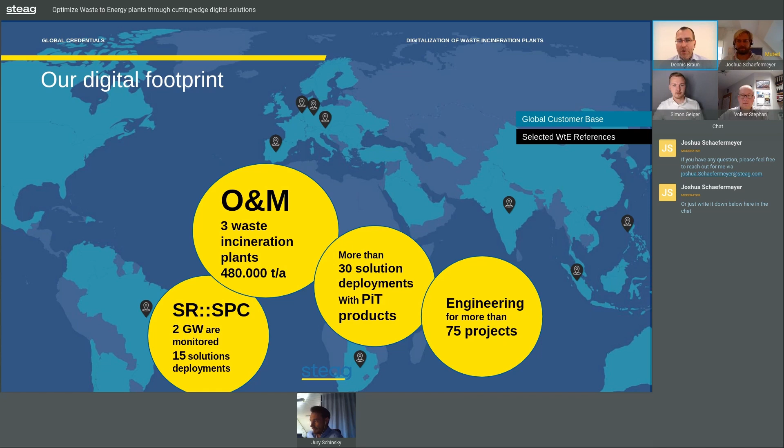Here's one view for you. That's again our map where we have customers around the globe, where we have partners. That was last time our view. And here for today, we compiled the waste to energy numbers. More than 2 gigawatts are already using our SRSPC, the module for predictive maintenance that you have seen here. We have more than 30 solutions with our PiT products deployed, which is especially what we will see with Volker pretty soon. And we have done engineering services in waste to energy projects for more than 75 projects, also around the globe. So that's pretty interesting, let us finish our little overview here.

And those are to maximize waste throughput, to reduce emissions, to reduce maintenance costs, and avoid unplanned downtime. That is something we will see with the SPC solution pretty soon. It's not about giving a warning a minute before something goes bad. It's about giving a warning a week, a month, 2 months in advance when possible. But of course, then it has to be very solid, very precise, so there are no false alarms that people have to take care of.

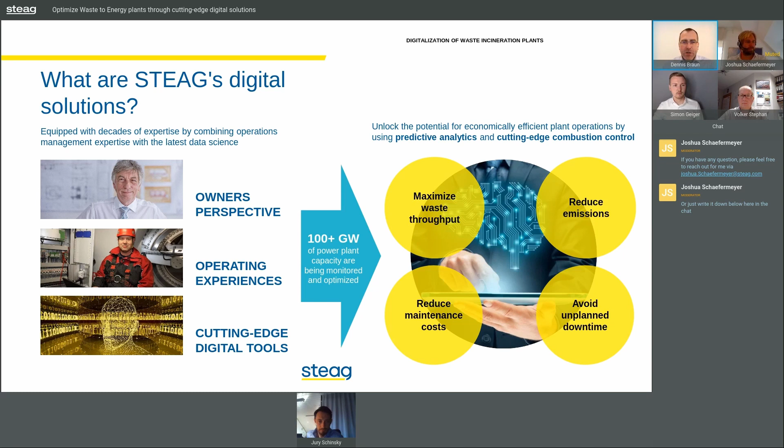So let us sum it up here, also with a couple of references already for the waste to energy applications. The things we use for these projects include EBSILON Professional, this tool we have for designing any kind of thermodynamical cycle, heat balances, and property tables. It's a highly sophisticated solution, and you can even get a test version if you reach out to us afterwards.

Next is the real-time AI-driven predictive analytics module, SRSPC, also with a machine learning module. We will see that pretty soon again.

We have another solution, SIPAM, which is a condition monitoring and maintenance system. So if that is part of the solution that's needed, we also have this to organize what measures are necessary, what needs to be done, when is it necessary to change the oil or filter and so on. That's all part of that module.

Then we look at the APC solutions: PiT Indicator for the complete temperature profile of the combustion chamber, or the PiT Navigator, which is able to optimize furnace capacity control by means of artificial intelligence.

Different modules are used in the projects shown on the right-hand side: Kassel, Rosenheim, Mannheim, Simmeringer Heide in Vienna, Ruhleben, Krefeld, Asdonkshof, Bonn, Vestforbrænding, and Rozenborg.

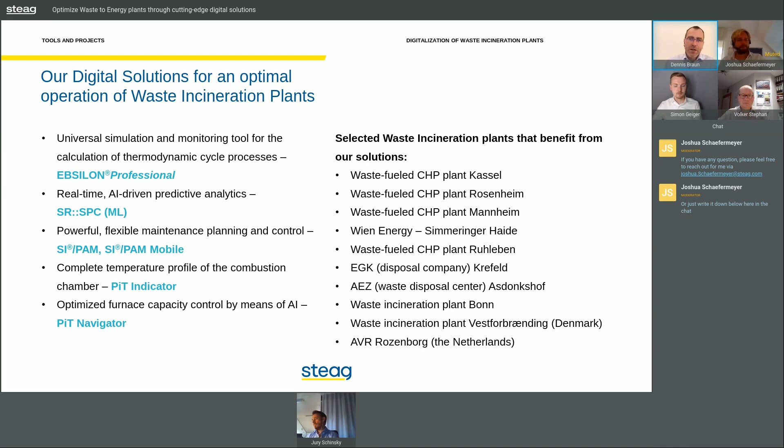So you see already a choice of projects. You can ask questions afterwards. We can have a private talk afterwards if you have specific questions, but this is today to give you an overview and show you what can be done. And if that's a topic for you, reach out and we will have further discussions afterwards.

So that's it for the short introduction here. I would now ask Simon to take over for a little bit and show us a little bit more of what we have there, right?

Yes, thank you very much, Dennis, for this nice introduction and the warm words. Welcome as well from my side.

I want to start with the solution Dennis talked about last, the PiT Navigator for waste incineration plants. And yes, I want to start with a short introduction.

The thermal waste treatment plants operate close to maximum incineration capacity in Germany and I think in very many countries around the world. Despite high capacity utilization, there is still potential that can be exploited, for example, through the use of artificial intelligence for combustion optimization.

With the following slides and in the following minutes, I want to describe the components and functionality of our modular system and concept for an AI-based combustion control for thermal waste treatment plants.

And yes, before I get into the technical details of the system, I would like to approach things a little differently today and start by telling you a few facts about the product that has been successfully placed on the market for many, many years.

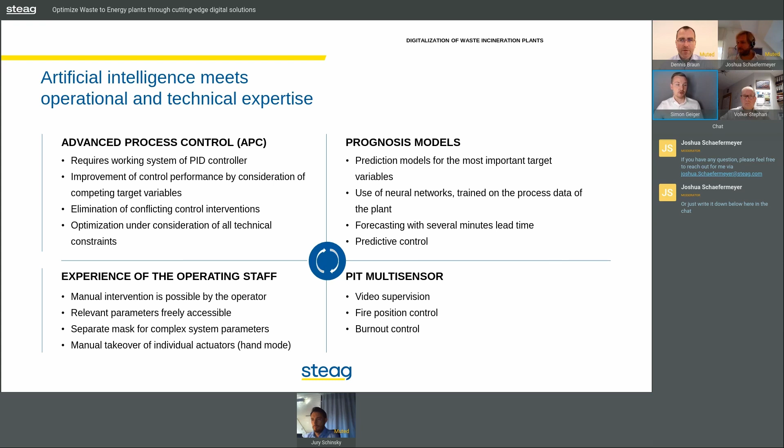Depending on the type of plant and the tasks to be carried out, additional information, for example the left-right inclination or the intensity of the fire, can also be extracted from the image and transferred to the control system. And with the next two slides, I want to show you just briefly two types of pictures.

You can see on the right side of the slide a temperature profile which is set by the PiT multisensor. You can have a close look, and you can see what temperature you have in which area of your grate.

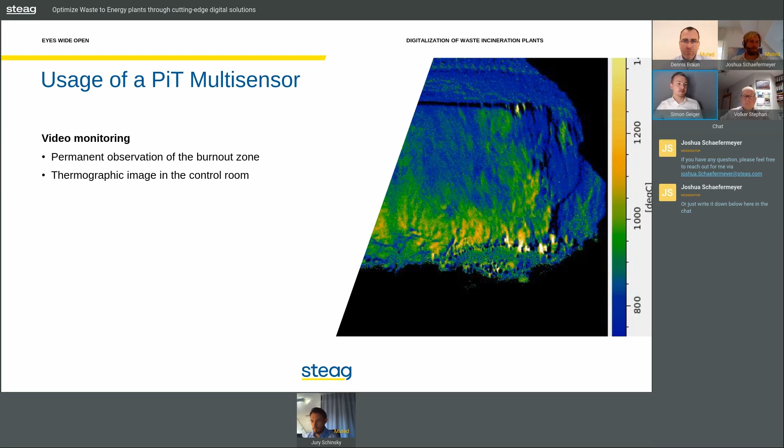And the other picture just shows, with a dotted line, the calculated and the detected fire end line position. All this information which we get from this multi-sensor goes directly into the system and is taken into account in the controlling of the system.

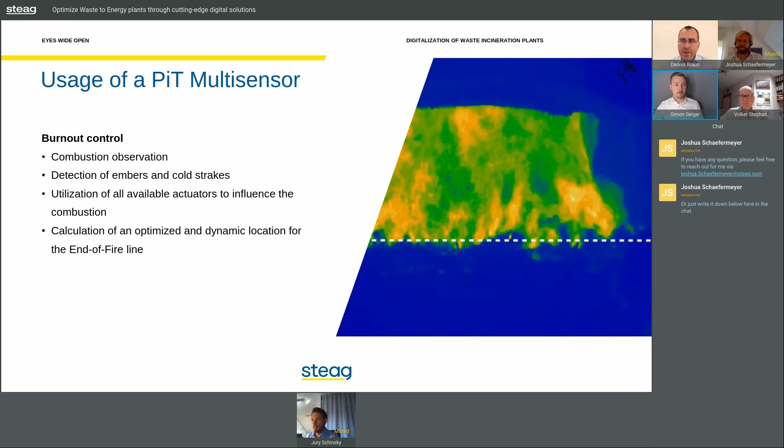Simon, one question from my side. I can see a couple of managers from waste to energy plants connected here as well. Often I hear that cybersecurity is a huge issue for them. How would such a system work? Is it fully cloud-based, or is there a danger of cyber attacks or whatever? Do you have a word about that as well?

Yes, this is a good question. The system runs on its own server hardware with a standard interface to the DCS. So the DCS is not stressed by the really CPU-intensive artificial intelligence tasks and calculations of the AI, and at the same time it is shielded against cyber attacks from outside.

So this is no problem for our system that the managers need to worry about. So like worst case, if our system would be gone for any reason, do they have to shut down their plant?

No, this is no thing our system occurs. So if our system has a problem, or if our server goes into shutdown, the plant can run by its own, just without the optimization like before, manually. Yes, that's good. Thanks a lot for clarifying.

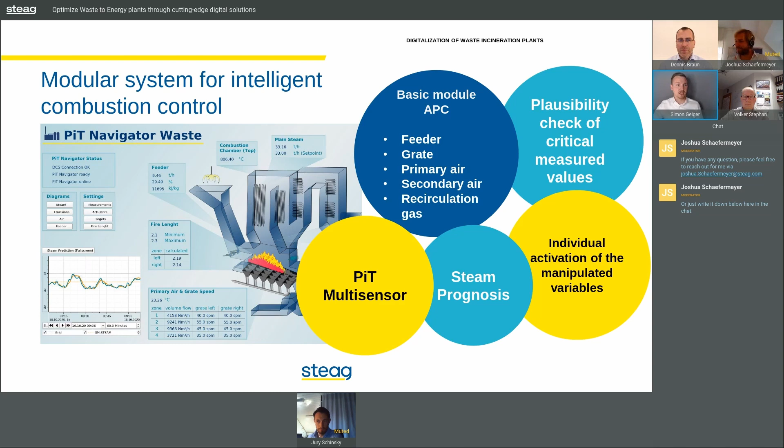And the associated increase in steam average is also very significant, by means of more than 3%. Furthermore, the reduction of emission peaks are not to be underestimated. Here, the average values of CO and NOx in the exhaust gas could be reduced. This positive effect is of great importance, especially with regard to compliance with the emission limits.

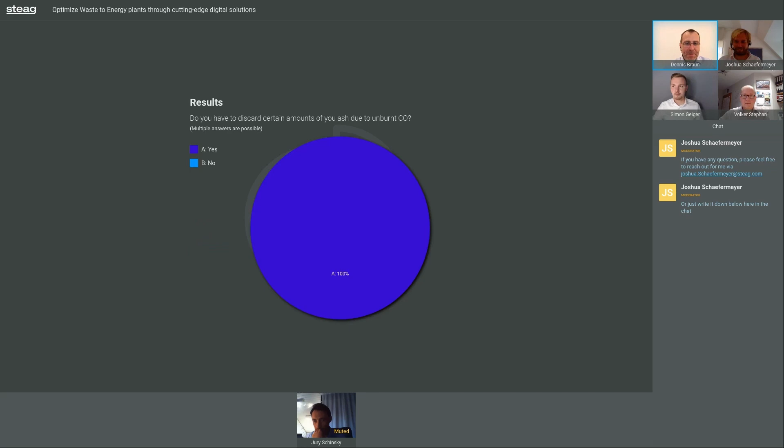But again, pretty clear. Great, let's finish here. Thank you very much, and that's again how it looks. Amazing, good. So that was a short interruption here.

Let us go back to Volker, more or less - you might have to reshare, Volker. I think I just kicked you out of there from the screen sharing. Sorry, but I think that's a clear picture. And yeah, how does that reflect? Yes, we are back, looks good. Yes, okay.

To give you a feeling of how the handling of the system looks, I would like to show you some examples. You see on the screen there are a couple of links - these gray boxes - because usually the operation of a waste-to-energy plant is not simply switching on and keeping it running for weeks. From time to time you have to adjust something. For instance, one key parameter which sees adjustments is the main steam flow. At the moment the plant has a set point of 41 tons per hour, and you see the measured value is also quite close to it. But it happens usually that for some reason the plant operators want to change the set point. A typical case would be that we get the set point from the DCS directly - whatever happens in the background in the DCS, our system simply takes over the DCS set point and tries to follow it. But to give you an example of how the handling for the operator could be, I just followed this link, and then you have a couple of settings the operator might change. There is, for instance, this box about the target set point for the main steam flow. You see the current setting is 41 tons per hour.

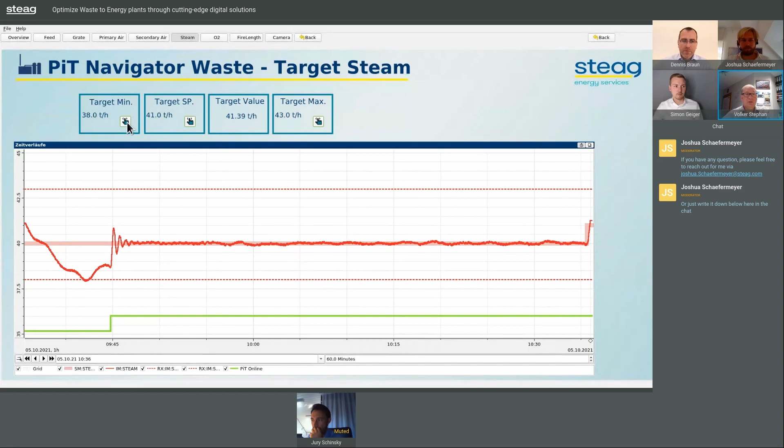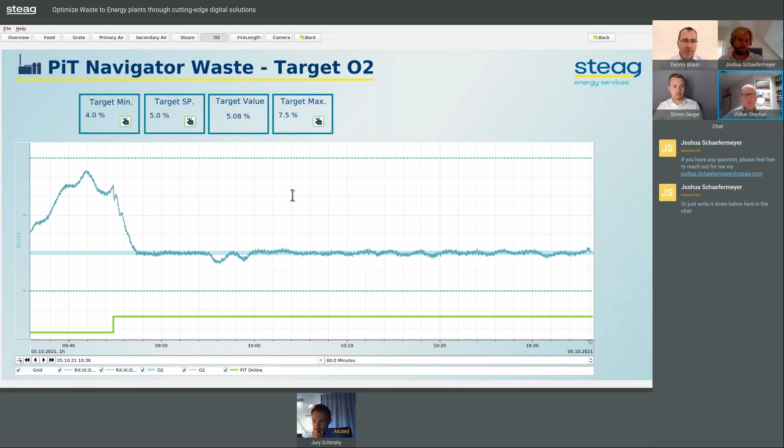Beneath the set point, the operators can also adjust some minimum and maximum values. And this is not only for the main steam, we have also the same setting for the oxygen. At the moment the set point is at 5%, but he could adjust it easily in the same way as we have seen before for the main steam flow.

What we can't see here is the window where we can insert the values, but it will be there. Sorry, what did you miss? Yeah, it only shows the overview here, but there will be, for all those following this presentation, a small window where you can insert another set point. I think it's fine. There's a way to put in some manual values. We can show that in more detail later on if somebody is interested, but thanks for adding.

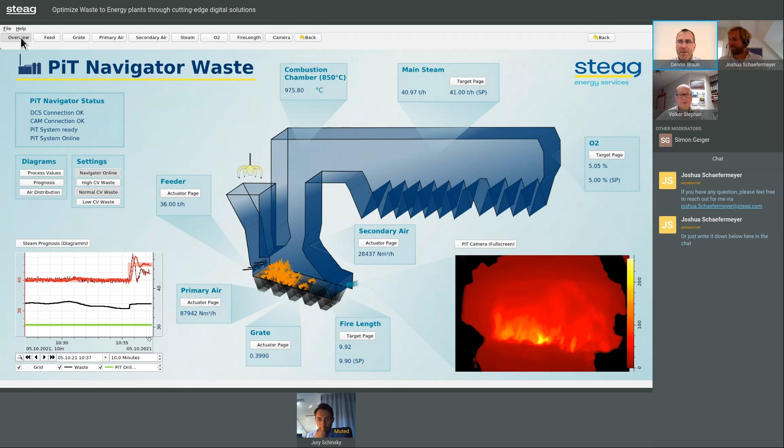If something is not matching what Volker sees, this is just because the screen sharing here is kind of limited. I hope everybody's back. If not, hit F5 to make sure everybody's coming back. I might do the same. Now it looks, oh yeah, funny, I can see Josh moving on the other computer. I'll be right back. I'm here, yes.

Another example, quite common in some plants, is that operators sometimes want to run an actuator by hand, be it for maintenance work on these actuators, and usually they don't want to switch off the whole control system. They just want to set one specific actuator to a specific value, keep it there for a few minutes, then give it back to the PiT Navigator. I can show you how this is done based on the feeder.

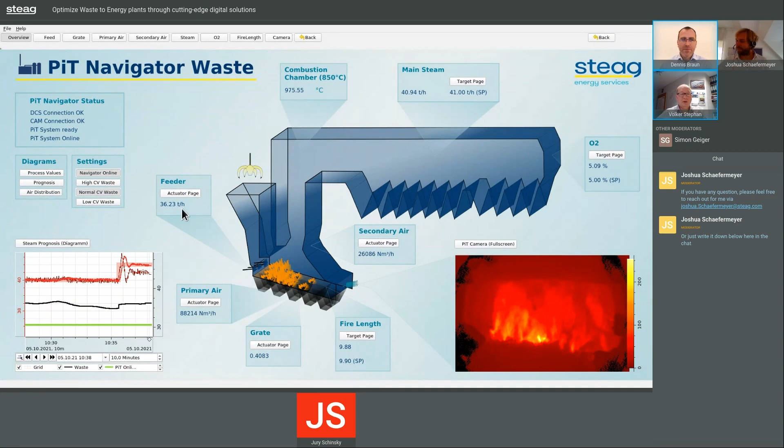If the operator wants to run the feeder in manual mode, he can follow this link to the actuator page, and then he gets this diagram where he can see how the feeder was run in the past minutes — this is the thick black line. These dashed lines are the upper and lower limits, where the operator can say for the control: please run this feeder always between 33 tons per hour and up to 40 tons.

And if he wants to run it, let's say, at 34 tons per hour, he just enters this number for the operator set point and activates hand mode by clicking this button. A few seconds later the current feeder speed jumps to the level the operator wanted, and the remaining system still keeps online.

You see the navigator module is still online, and all the other actuators are following the controls. Only this actuator is running in manual mode, which is displayed in this orange color. So the operator can see at first glance that all actuators are in automatic mode, except the feeder, which is running in manual mode.

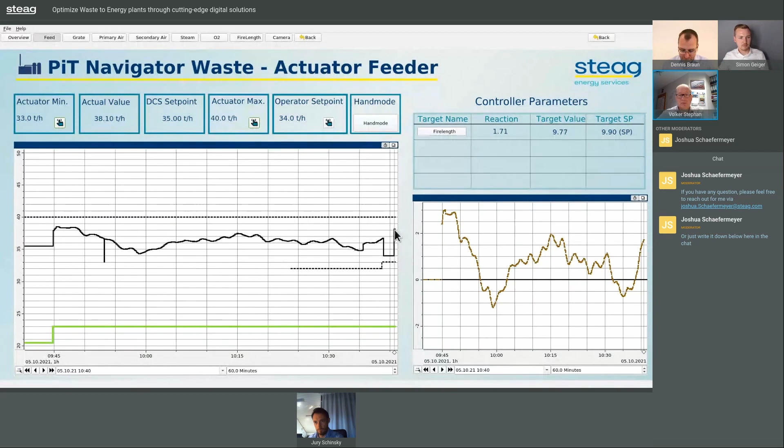Go to this screen, deactivate the hand mode, and that's it. You see automatically the control system takes over control over the feeder speed and jumps back to a higher level. I guess because the steam flow was a little bit below the set point. So that's all you have to do for this case.

There's one other example showing how operators can be integrated into our system, because for some measurements the operator still has an advantage over our system, especially regarding the composition or quality of the waste. The operators either run the cranes feeding the feeder itself, or they at least have a view of what type of waste is put into the feeding system. Based on the experience and knowledge of the operator, it's sometimes helpful to get this experience into our system.

This can be done by, for instance, these three buttons you can see here. This is a selector where the operator can say what he thinks the calorific value of the waste right now is. And if he sees that the next bunch of waste is of quite low quality, of low calorific value, he can simply tell our system this by activating this low CV waste button.

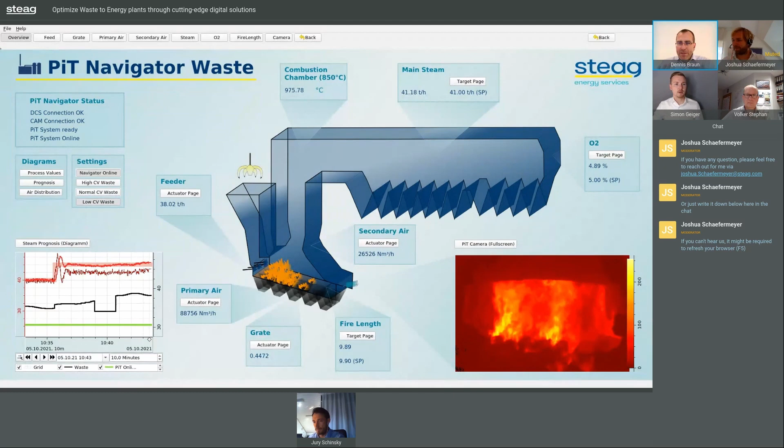So if I could ask Simon now to quickly share a little bit of our AI-driven predictive maintenance, it's a small break here right now. We finished the PiT topic for a moment, we switched to another module, just for everybody to make sure that it's not the same, but we can really find out when what makes most sense, and sometimes even both modules might make sense.

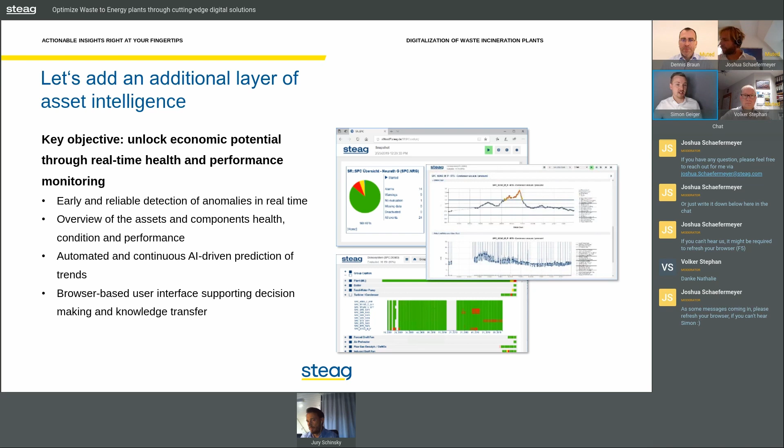So I want to show you the next slide, our user-friendly data visualization. We deliver the system, the SR-SPC system, with a visualization called SR viewport. Here you have an extensive dashboard with the most diverse information at your disposal. In addition to the performance parameters of your entire plant and individual components, anomalies detected at an early stage can be displayed and shown in real time.

The visualization is also available for your benchmarking purposes. Here you can generate monthly and extraordinary reports, fully automatically and AI supported. And the SR viewport is available for smartphones and tablets, for Android as well as for iOS systems.

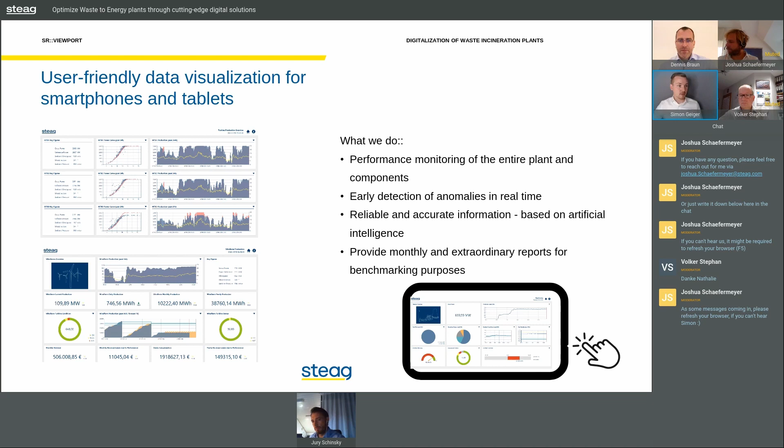Before we get into the technical details, I would like to briefly summarize the benefits with this short slide. You get a comprehensive overview and transparency through processed data and derived KPIs. The system allows you to early detect inefficiencies and damaged infrastructure. This helps to avoid consequential damage as well as unplanned shutdowns, which are really cost intensive.

Rather, you, as the operator of the plant, are given the opportunity to plan necessary maintenance work early and sufficiently. In addition, you will be able to address the supply of spare parts at an early stage and thus avoid supply chain problems. All in all, the system ensures significantly improved availability and efficiency of your plant, which pays off monetarily in the end. For this reason, I think we can say that SR-SPC helps you to reduce your OPEX and increase your energy revenues.

Now I think I have spoken enough about the advantages of the system and benefits, and it's time to show this also on a technical level.

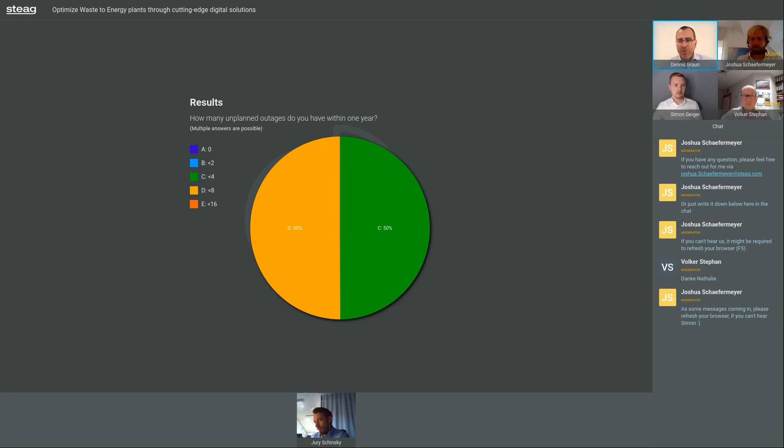And yes, Yuri, share with us how that looks in the real world, please. Alright, so can you hear me loud and clear? Yes, I hope so. Great, so first question from my side - we have 7 minutes left, do we have add-on time? Yeah, we'll give a little extra today, another 10 minutes or so. If you're in a hurry from the audience, you can later look at the recording to finish up, but we shouldn't rush - this is important content, so we'll take some extra time. Thanks for asking.

Very nice, okay good. So I will start where the other slide ends and give a brief overview about our technical approach in regards to AI predictive maintenance. Since the technical issues were presented in the other workshop in more detail, I'll just give you a brief introduction.

So the major problem is, number one, to avoid downtimes in the waste-to-energy sector, and secondly, maximizing the performance. So to avoid unplanned downtimes, you have to monitor and get a closer look into the critical assets of a power plant. Our tool gives you the technical improvement to do that.

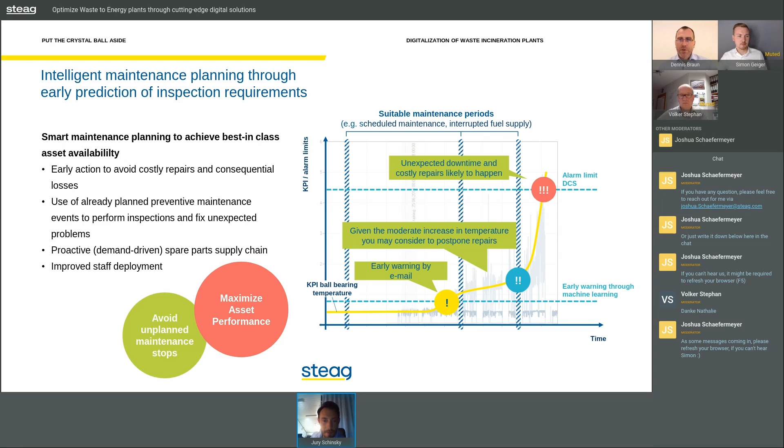You want to go to the next slide? Yes, next slide, please. And to get this early warning, we are actually creating a digital twin of each measurement or asset in a good condition, so that we enable the customer to monitor online the condition of the bearing temperature, or delta pressure of a flue gas system - it depends on the asset which we are monitoring.

So by creating this digital twin with our tool, we have the reference value for the specific asset or measurement, and by comparing the current sensor-based data with our reference, we enable the customer to detect anomalies - changes in the behavior of the measurement or the asset - at an early stage, and of course try to avoid false alarms by using very specific statistical methods on top.

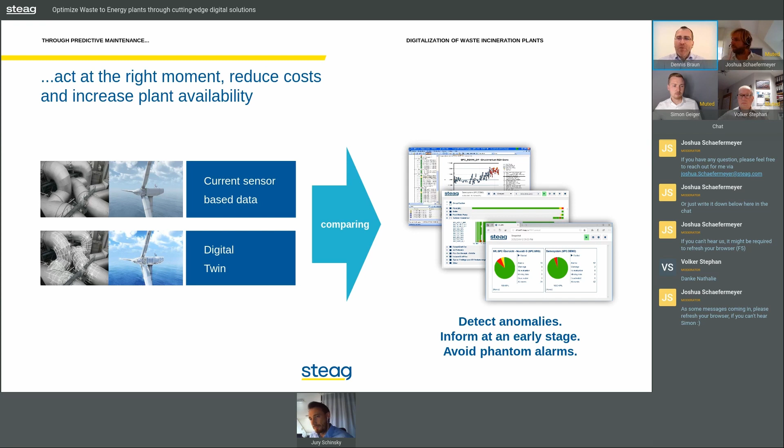Maybe we can use the next example here of one of the projects you're involved in. Anomaly is pretty broad, it could mean purely data science where you have no knowledge of what's going on. But in your case it's different, you're coming from an engineering perspective, right? So let's have a look at how that actually looks, and how engineering related those anomalies are.

Pretty technical already. Yeah, of course. So basically how we get to our reference value is we're using the raw process data, and with an AI learning process we create this digital twin, as I mentioned before, in a healthy, good condition. So for each point in time, also in the future, we have a reference of this specific measurement, this specific asset in a good condition, and can compare the current condition with this reference.

Creating a so-called key performance indicator, which is load independent, so it's basically an ideal indicator. And as soon as this indicator deviates from this normal behavior, we are able to identify these changes and give a notification as soon as a critical level is reached.

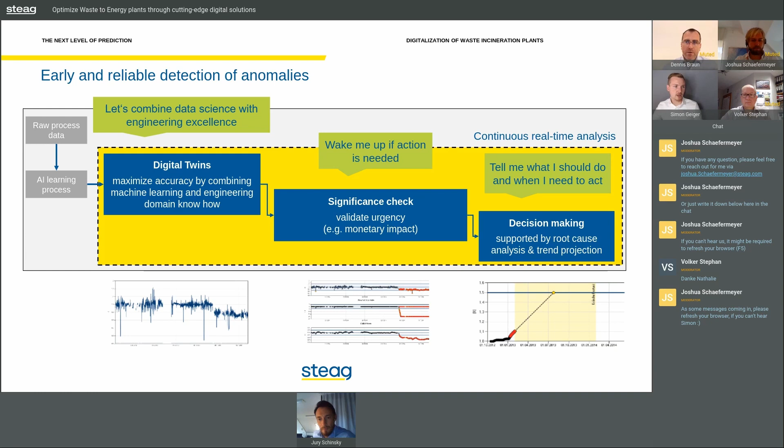So yes, I think we can go to the next slide, Yuri, to the large scale project. Yeah, of course. So MVV, in the waste energy sector, in 2018 we got our first big customer, the pioneer in this sector, MVV, with a yearly consumption of 2.4 million tons of waste, using waste, biomass, or biomethane fired plants.

This customer, after a first pilot project in Mannheim, decided to use this tool for all other plants. There are 13 sites in total, and 7 are already using our tool. With this fast-growing team, there are currently 850 KPIs monitoring the 7 sites, and it's still growing. We are currently implementing the next 5 units or sites.

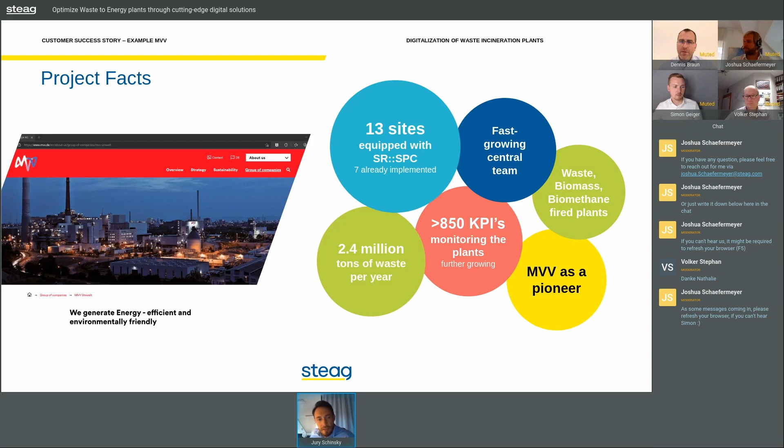Yuri, if I understand right, when you say we are doing that, that includes you, our colleagues, but also the customers' experts together. Is that right?

Yeah, that's right. In the evaluation phase, we start the implementation on site. We train the staff — by we, I mean STEAG Energy Services implements first, then we train the staff from MVV. After this training, the customer is enabled to create their own KPIs. So on the front end, we give a base configuration with around 30 KPIs for waste to energy, usual KPIs which we also created during the training and workshop together with the customer.

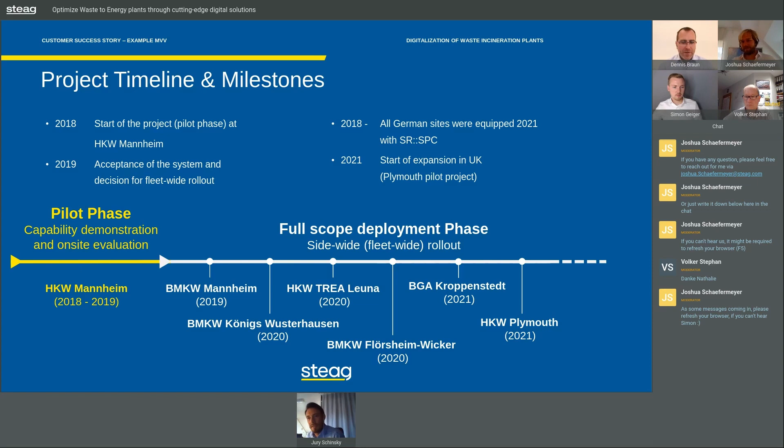Good, created KPIs, right? Okay, so we can go to the next slide to the examples. Maybe we can pick one example for now — we can save the other ones for another webinar, or if somebody is super interested, let us know and we can have a private meeting. Then in 5 minutes we can wrap up here since we're running a bit out of time.

A major problem in waste-to-energy plants is the fouling of the flue gas path. There should be periodic cleaning processes to avoid high delta pressure in the flue gas path. So the timing of the blast is very critical, and also checking after the cleaning process whether everything is now running at normal conditions or not.

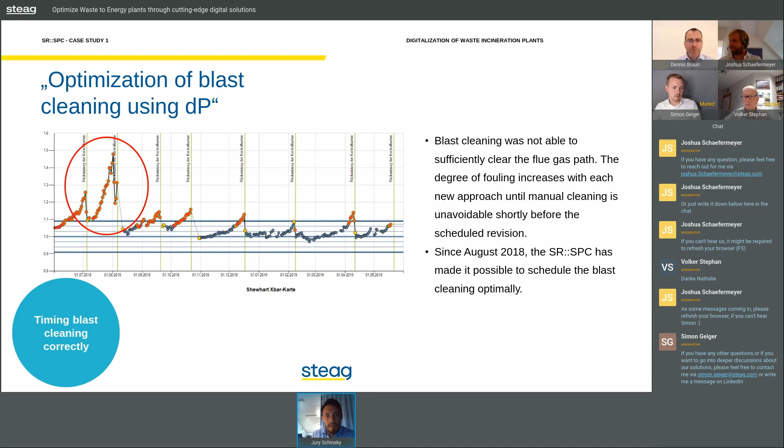This takes a long period of downtime, and usually power plants try to avoid it as long as possible. But as soon as our system was implemented, you see this memory effect was no longer there. The customer was able to time the cleaning process very regularly and very precisely, based on our alarm system here. This was implemented since August 2018, since the project evaluation phase started. Okay, this is one example.

I can quickly add something — another method would be to monitor the cooling of the flue gas system by using the temperature of the flue gas, which is also an indication of the fouling process. You can combine these measurements, or depending on the design of the flue gas path of the boiler system, decide which measurement at which stage of fouling is much more useful to time the cleaning process. You can use the temperature measurement to decide when to clean. You also see in these alarms you get an early alarm, giving you time to decide when to time your cleaning.

And usually it's 1 week, 2 weeks, 3 weeks, depends on the fouling process. You can see it here in this chart. And here it looks so simple, just the Shewhart X-bar chart, and that's it.

But of course, in the cockpit, you have already, what we saw in the previous webinars, many different views already prepared up until the raw data that is shown there. Plus, we give the training to the customer. They get full access to the studio, where they can see different views, XY charts, and so on, to really deeply analyze what's going on there. So this is just the tip of the iceberg, but it shows pretty nicely what can be achieved there.

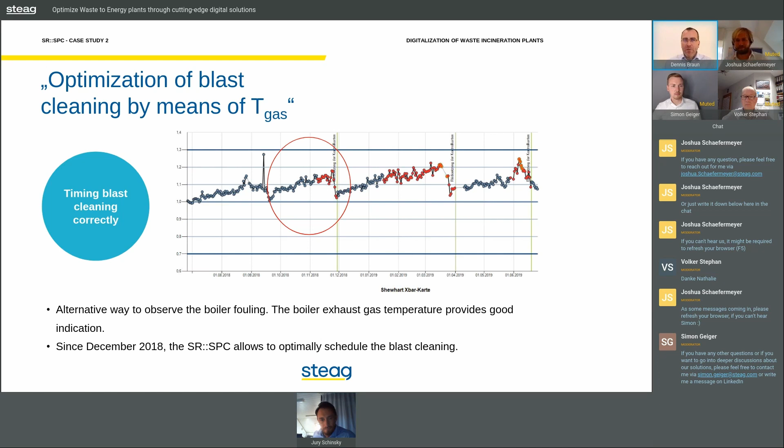Okay, so maybe now it's time for a super quick wrap up here. I think we've seen different solutions today to improve waste to energy plants, either with the PiT Navigator to improve the actual performance right now, or here with the SPC for having the long-term effects, a very high quality of looking at the data that's already there and getting a wake-up call weeks in advance.

So that was pretty impressive. I know there's much more to tell, so if you're interested, let us know. Also, we will take some of those stories and some of those case studies here with us for the Energy Week in November. I would like to quickly share the link here with you.